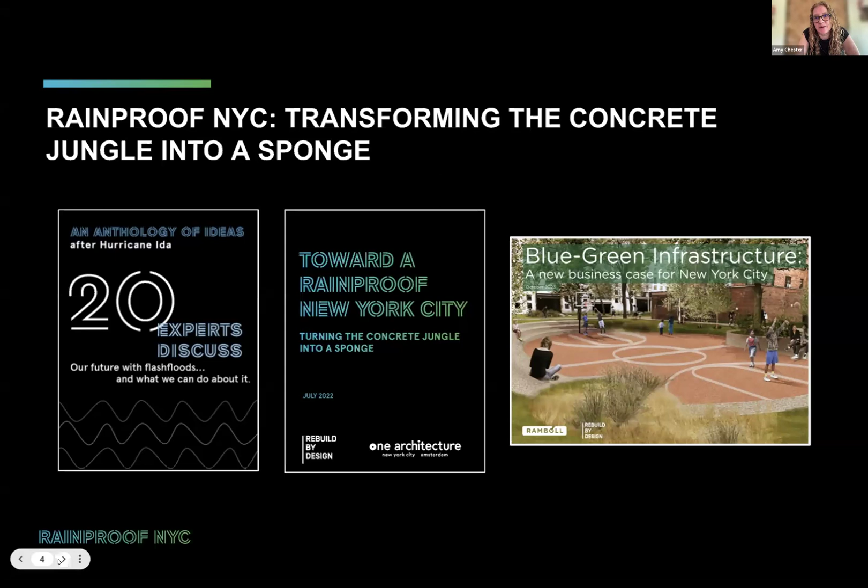We're here today to hear from Caleb Stratton because we are all experiencing increased flooding from rain events. Rebuild by Design has been working on this since Hurricane Ida, and we have a number of resources focused on New York City that will inform policies in the areas you're working as well. Right after Hurricane Ida, we brought together 20 experts who wrote essays on things we can be doing in our communities right now. We followed that with a more thorough report, Towards a Rainproof New York City, launched with One Architecture. Then we did a cost-benefit analysis with Ramboll on blue-green infrastructure in New York City, which found a 2-to-1 payback. If that's a 2-to-1 payback in New York City, I'm sure it could be even higher where you live.

Our overall goal is to adapt with living with more water. Right now we're running 3 working groups in New York City, each co-led by an agency partner and an NGO lead, comprised of NGOs, agency partners, and other stakeholders. We're focused on 3 challenges: how can we shift New York City's policies and priorities to create a comprehensive plan to prepare for increasing rainfall; what an equitable buyout program could look like for New York City; and building capacities amongst communities and the private sector and NGOs so we all share the responsibility.

What's really exciting about the working groups is that we get to learn from other cities, and that's why we are here today. This is one of many events in our Rainproof series, so please, if you're interested, use the QR code and sign up for a conversation with Rosetta Elkin, who wrote the book Landscapes of Retreat. She'll be joined by experts from SCAPE landscape architecture, from Buy-in community planning, and from the Nature Conservancy. If you'd like to see a full list of events, here is our Rainproof calendar.

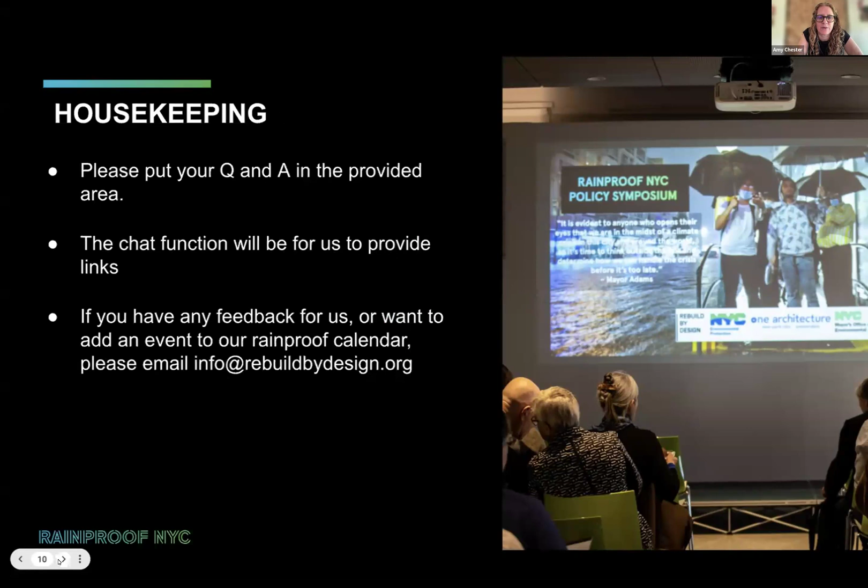Hello, everyone. My name is Rafal, and I'm the Rainproof Fellow at Rebuild by Design. I'm going to introduce our exciting moderator for today's event, Doug McPherson, who's an interim manager at Real Edgemere Community Land Trust. Doug is an urban planner from Queens, New York, and over the past 15 years has worked to expand opportunities for affordable housing, address inequities in open space access, and improve community health. Doug earned his bachelor's at the University of Pennsylvania and his master's in city planning from MIT. We thought it'd be really exciting to bring a New York City native together with someone from a different city, and also someone working in community versus someone working in city, for a great conversation today.

And now I'm going to turn it over to Doug to introduce our speaker for today. Thank you. Thanks to Rafal, and thanks to the entire Rebuild by Design team for creating this series as part of the Rainproof NYC initiative. Rebuild has been really helpful to local organizations like mine in Edgemere, who are no strangers to flooding but are trying to navigate how we can live with more water and bring more meaningful investments in blue-green infrastructure to our communities. Today's event is meant to be a conversation. Caleb is going to present a few slides, and I'll pop in here and there to ask questions.

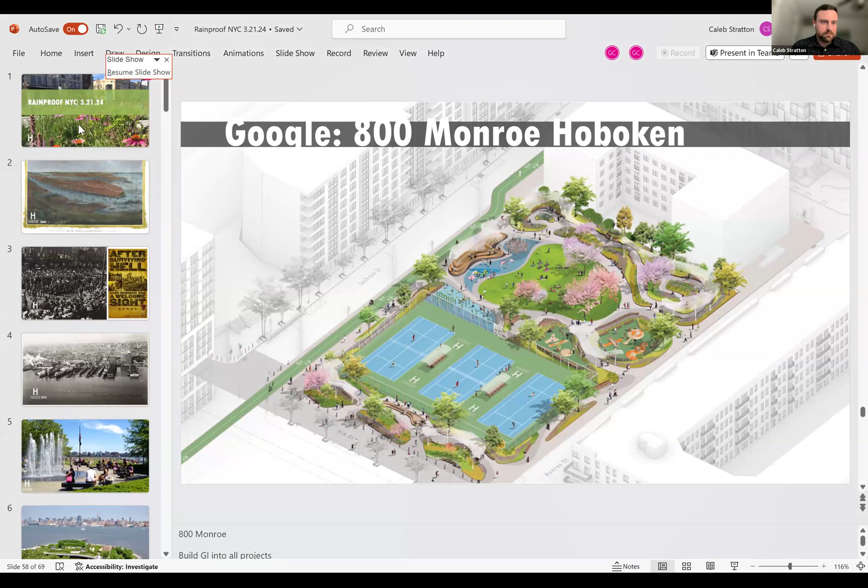So pulling up my slides, Doug, can you give me a thumbs up? We're good, just need to put the slideshow on. Let's see if we can get this going. Resume slideshow. I think we're almost there, we just have to hit a full screen button. Zoom slideshow. Close out of that, let me stop my share and try again. Just give me 1 second.

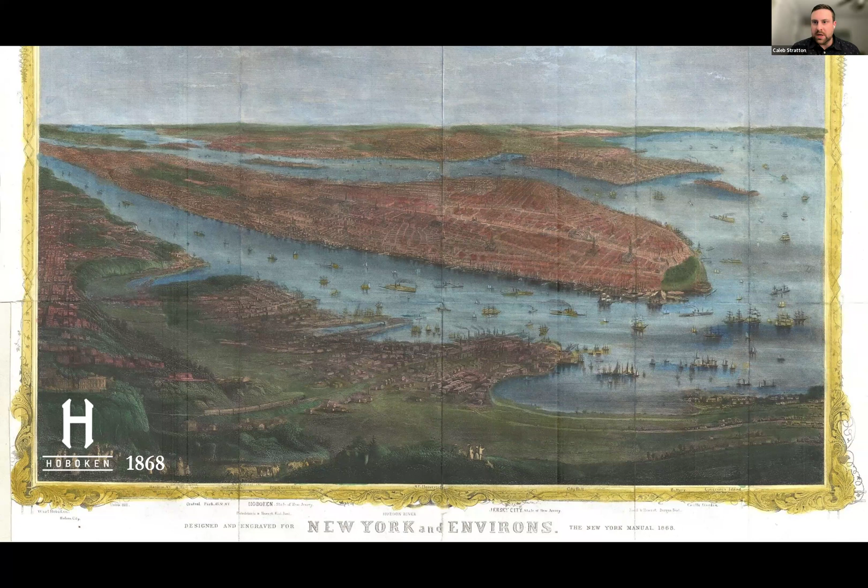So I'm going to start with what Hoboken looked like 150 years ago. The large landmass in the middle is Manhattan, built out, and the small community on the west side is Hoboken. You can see the Palisades, but mostly Hoboken was wetlands, and development occurred in the floodplain and was filled in over time. Just a little statistic: Hoboken was the point of disembarkment for World War I, but mostly it was a working industrial waterfront. And so what does that mean? Kind of low-lying bulkheads, congestion, hazardous materials, and it wasn't really built with the current climate in mind.

Over time, it's morphed into really a recreational waterfront. We have great views of New York City. It's almost 100% - we just purchased the property, recreation and public use for the entire distance of our waterfront, which is about a mile and a half. So our greatest asset is also our greatest point of vulnerability.

This is images from Tropical Storm Irene, 2011, and then we had Sandy in 2012. As you can imagine, that was really a wake-up call for the community in trying to reconcile what we thought was a safe space and realizing that we had to quickly modify our thinking. This is actually my block from Superstorm Sandy, and Grimaldi's is our favorite pizza spot. When that kind of hit home, I was in grad school at the time, and I walked into the City of Hoboken. I was like, I'm studying this stuff, I'd like to work on these issues. Ultimately, I got a job at City Hall, where we started to think through and process how do you transform a community that has different flood risk profiles and begin to adapt.

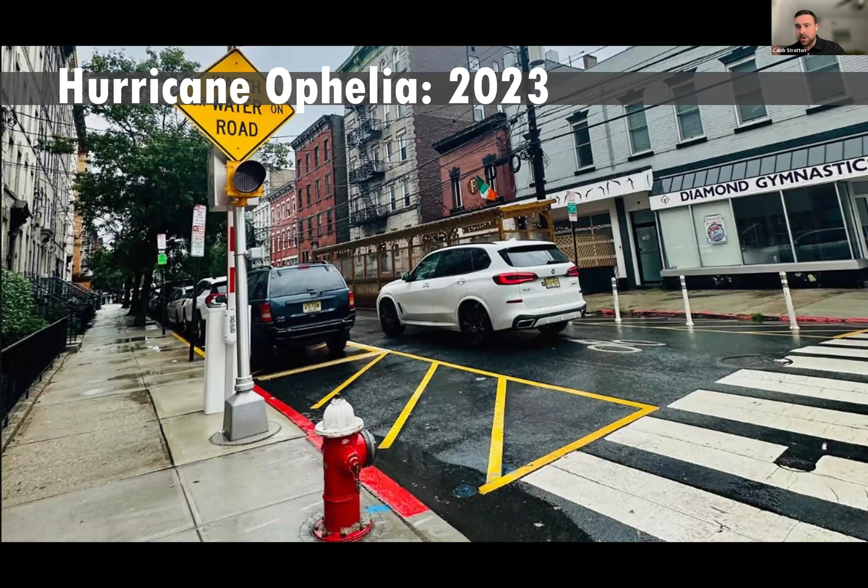Some of the images I'm going to show now, you can see we've had improvement over the years in managing stormwater, so much so that within our combined sewer overflow system, we can manage almost 90% of rain events. Our flood pumps and systems are performing for 50 events a year, and we're getting water on our streets for one tide cycle 4 to 6 times. So when we talk about resiliency, I'm really talking about it in the duration of impact, the extent of impact, and the frequency that it's occurring. So, Chief Resilience Officer hat - how are you bouncing back from shocks and stressors?

And if I could jump in.

Yeah, sure, Doug. It seems like you guys are having a moment right now. We talk about the beautification of the waterfront and flooding. There's recognition of how the investments Hoboken has made over the past few years allowed you to bounce back from a significant rainfall event last September, which would have been a lot more crippling if it had happened 10 or 15 years ago. So it seems like the mood is a mix of celebratory and hopeful that what you guys are doing is working. But if you could take me back to City Hall a decade ago, in the wake of Sandy and Irene, how was the mood different then? Was the attitude daunted by these challenges?

It's very destabilizing when you're trying to wrap your arms around issues and break them down into manageable pieces. To give an example, we didn't have modeling 10 years ago. We didn't have modeling of coastal storm surge. We didn't have modeling of our rainfall floodplain. So when this is happening over and over and over again, it becomes the biggest community issue. And then there's also a feeling of, what do we need to do? What's our responsibility?

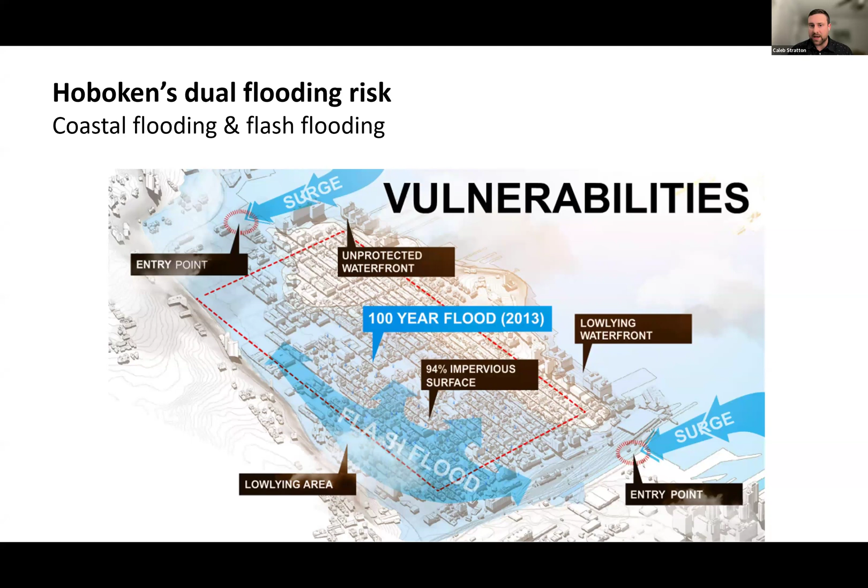So to talk about why that matters in terms of our vulnerability, there are 2 breach points in the city of Hoboken for coastal storm surge, one at the north end, one at the south end. That's how we design our seawall interventions. And then the west side, almost all of it, is vulnerable to flash flooding - almost completely impervious surfaces, mostly built out, low-lying, pre-existing hydrology. It's a wetland - like all the worst things you could have to build on.

So what that means for us is that in dark blue, these are our rainfall flooding hotspots - places we know are going to flood if we get a lot of rain. More than 0.8 inches per hour tends to produce some kind of street scale flooding in Hoboken. The light blue area is really the area that flooded during Sandy, but also our coastal floodplain. It's also a regulatory floodplain, so that's where we're modifying building construction. More than 80% of the city is in that coastal floodplain.

I think these statistics are important because the NFIP does insure $2.3 billion of property in the city of Hoboken - I think we're second or third in the state. Our residents pay premiums of $8 million a year, and that's like paying for health insurance. But there's a cap to that program, and what that cap means is we have a delta of about $8 to $10 billion of flood risk that's not covered by the National Flood Insurance Program. So what does that mean? That means we have a lot of room to develop interventions to reduce that risk, and also defray future premium increases for insurance.

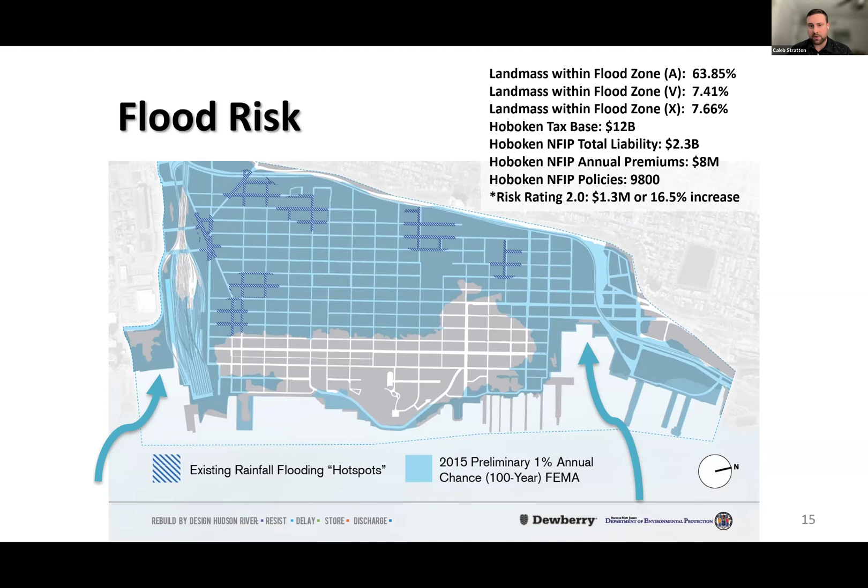I got to see Amy talk last week, and these are real concerns for people that have policies and premium increases. The risk rating 2.0 that's rolling out is substantial - a 16% increase through 2025 for our residents. So we want to defray insurance costs, we want to defray actual flood risk, and we were fortunate enough to work with Rebuild by Design back in the day.

This is maybe 2013, 2014, we got started. There was a federal program at the time with a big pot of money that was put out there. Rebuild organized teams, led the design conversations. We worked with Royal Haskoning DHV and the Office of Metropolitan Architecture to develop a 4-part integrated water management strategy.

We borrowed from the Dutch, and we took advice from international experts, which is Rebuild's bread and butter. The 4-part water management strategy for us is, number one, keep storm surge out of the community. That's the resist element. Then using their 3 strategies: delay, store, discharge, but there's actually an ever expanding list of strategies we're using.

Discharge is active pumping during rain events. Delay is keeping as much water out of the combined sewer system as possible. And store is developing underground detention basins that we can control and that create more capacity within our sewer system.

So Rebuild helped us take that uncertainty, break it down into strategies, and put it into actionable pieces that the city could undertake, that the state government could undertake, where we could get federal support. That was the initial $230 million award for the resist element of the project. That project is now $392 million. So good ideas beget additional financing.

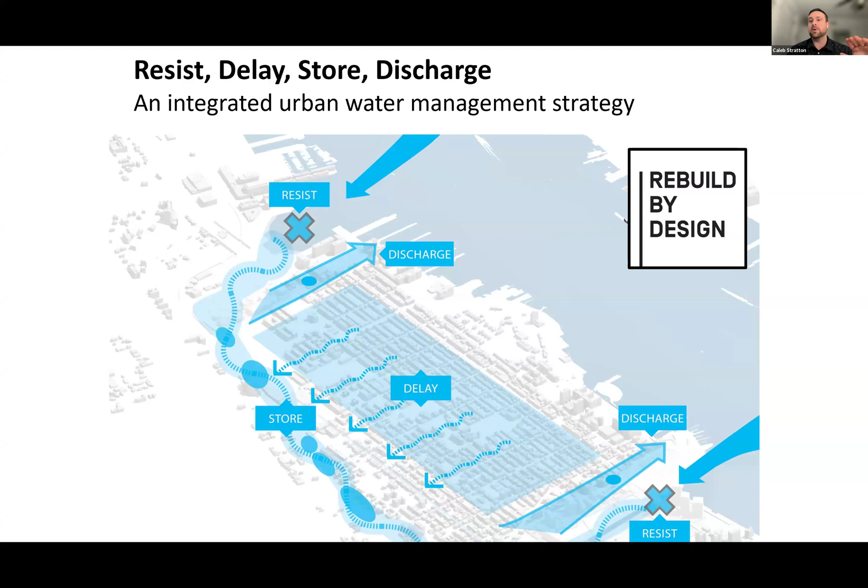I just want to, if I slow down too much Doug, speed me up, but I'm going to get into the exciting things quickly here. I just think it's important to talk about where we came from and where we are now, because you go from the concepts into, where does this go on paper?

The dark blue area here, north and south end, the reason why these lines are askew and not directly on the waterfront is there was a public feedback process we went through. If you build on the waterfront, it's taller, it keeps people away from the waterfront and engagement. What we heard was: don't take away our views, don't disconnect us from the waterfront, don't build in our neighborhood, don't build in front of my property, don't build behind my property, but don't leave me out. There's a bunch of different constituencies that went through the concept development process.

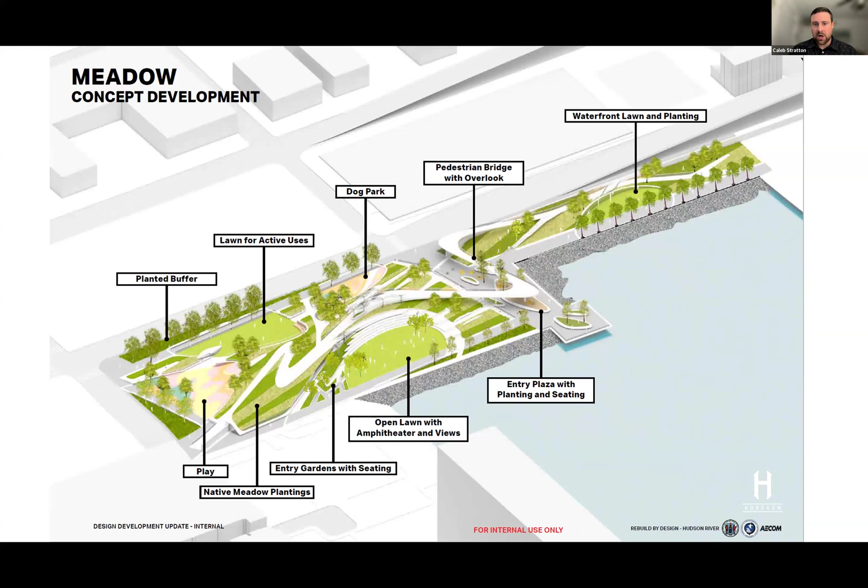I just want to touch quickly on Rebuild by Design, the elements that we're doing on the waterfront. We're going to build parks, and this is a concept that incorporates an 11-foot high seawall underneath an active area on the west side and a passive area on the east side, with a walking path that traverses the high point in elevation. The concept was to maintain access to the waterfront, but we're also going to use gates. As far as scale goes, this project is about almost 2 city blocks in size.

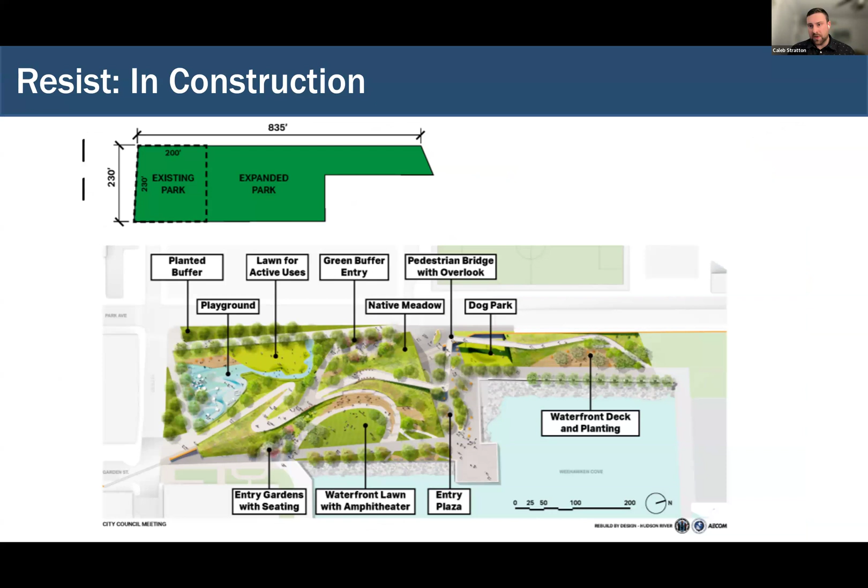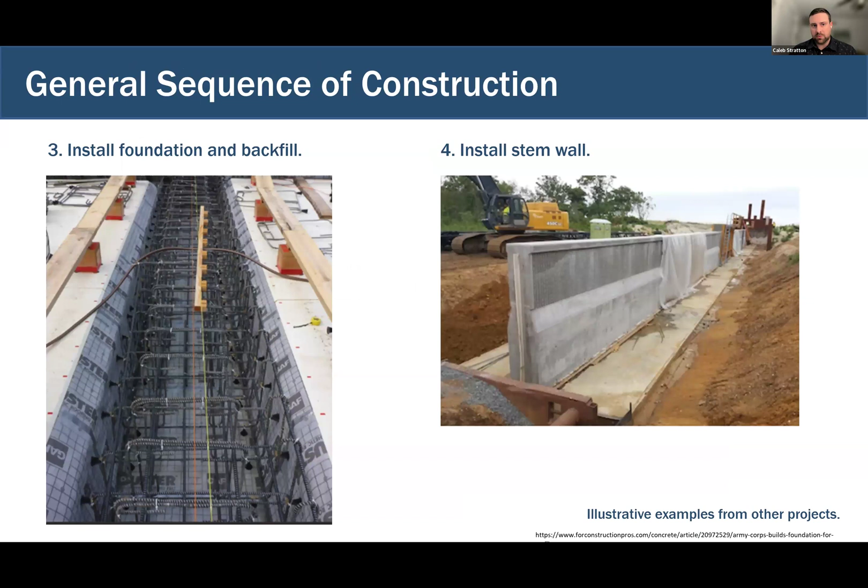This is part of that state partnership for coastal flood risk reduction. Underneath that is heavy foundation construction with foundations and stem walls. But what it ends up looking like as it winds its way through the city is something we've used an aesthetic treatment for.

So color, material, landscaping - the colors we chose are from the state flag of New Jersey, but it's also Dutch, also safety orange. It's something that contributes, we think, to the urban aesthetic. Communities fight about what that actual color ends up being - everyone wants to do a dark blue and have it blend in. There's still tension on what the aesthetic of that's going to be over the long term.

Everything on the backside of the city of Hoboken, really rainfall related, is what I think this group's interested in - how we manage our infrastructure that's interior to this coastal levee area.

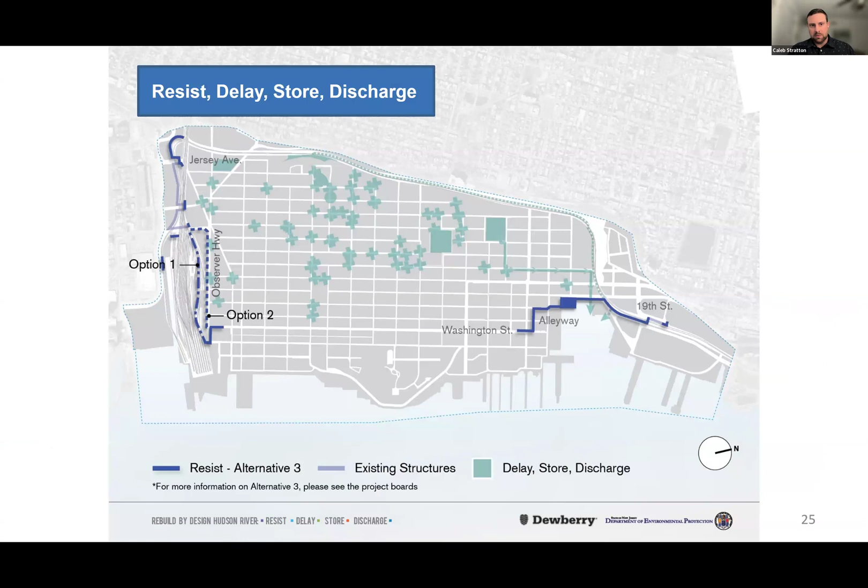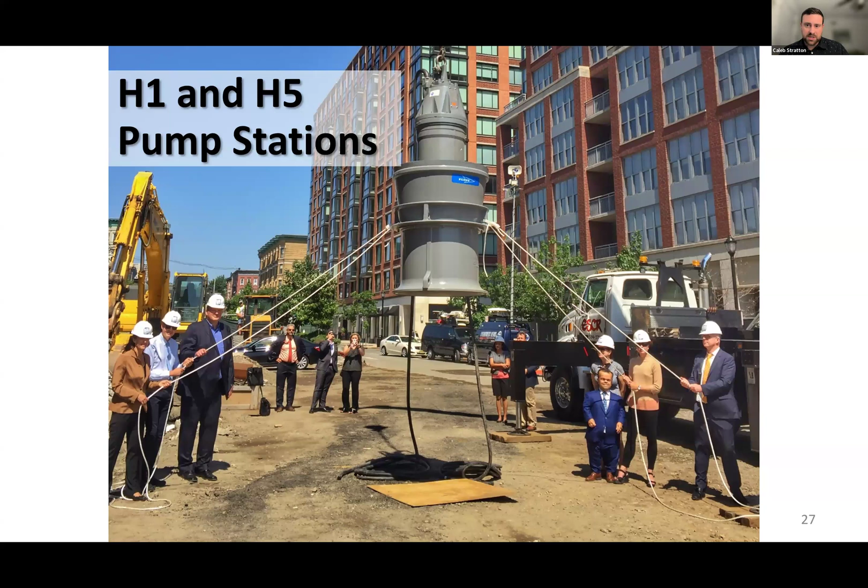In siting the pumps, we did those in the right of way. This is the first pump station we constructed, H5, part of our discharge strategy. This is what's going on below ground, connecting into our CSO, and that's how we actively manage rainfall when it exceeds the capacity of our park systems.

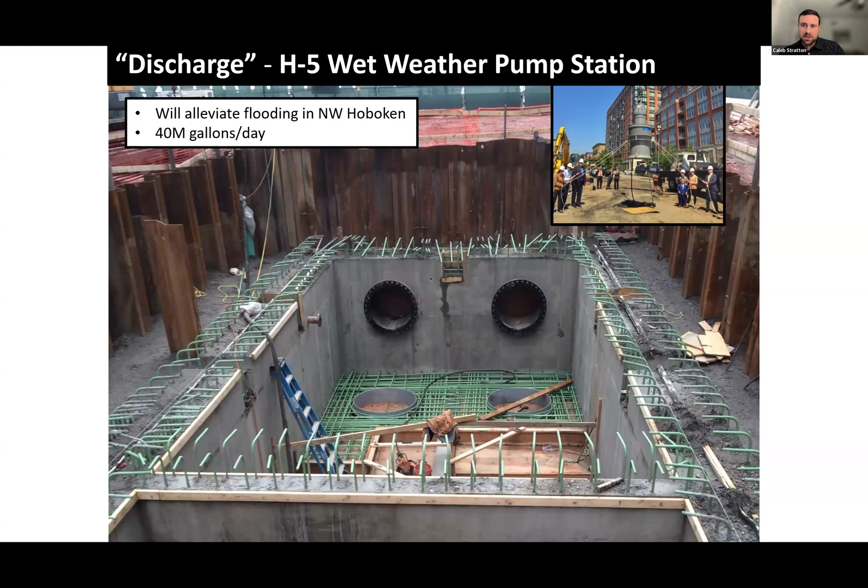The second pump we built is H5, designed by local architect John Stasi. This is a 40 million gallon per day pump. The reason there's this large external housing is because we have backup generators, since our H5 sewer shed is in the lowest lying area of the city - we want to make sure it stays online.

Our H5 sewer shed is also part of where the Housing Authority redevelopment area is, and we actually dewatered the city from Superstorm Sandy with this pump station.

Getting into the delay and store projects, the first one we did was a demonstration project at City Hall - taking all the downspouts from City Hall and connecting them into cisterns. The cisterns are then used for rain gardens. We did porous concrete there and built a green roof, but put it on the ground.

The idea was, what is the lowest cost, highest impact investment we can make? For less than $500,000, we took an entire city block out of our combined sewer overflow, while also being able to demonstrate proof of concept for what green infrastructure looks like and how it's managed.

This was what ultimately got us into the development of Southwest Resiliency Park - a 1 acre site we acquired that was a surface parking lot. We went through design concept, mostly passive uses - there's a dog park here - but the purpose of that project was to make sure that in Southwest Hoboken there's park space within a 5-minute walk, and it had to manage stormwater very well.

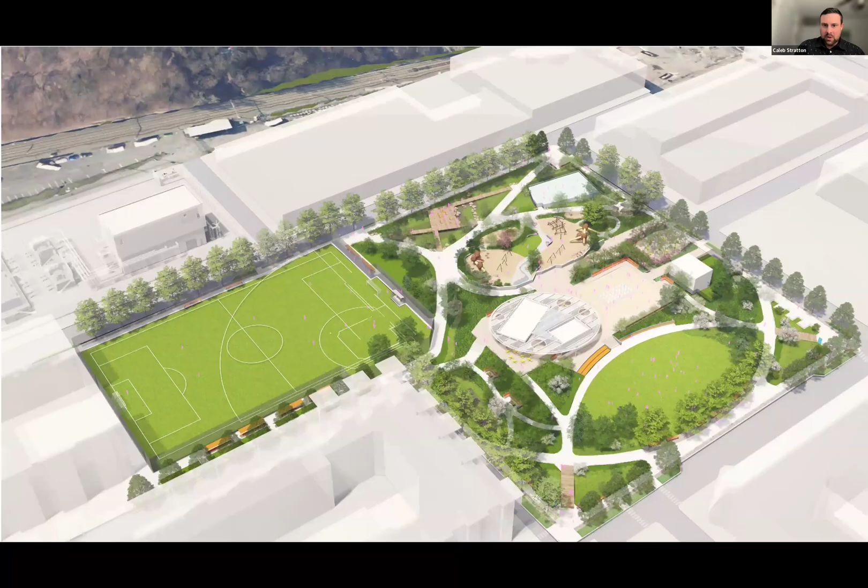Our next project, a little further north in the city, was Resilient City Park. The concept was to buy the most acreage in a sewer shed that we knew had a lot of flooding. It was a large acquisition, so the city used our Open Space Trust Fund to do a $30 million acquisition, and the project itself was about $50 million.

On the surface you see active and passive spaces and the use of green infrastructure, but what's really going on below the project is where we spent the majority of our money. Deep pile foundations, and the pink is a 1 million gallon tank connected to the H6 pump station, our third pump station. This project is exciting because it's also part of a storm sewer separation that separates sewers in a 40-acre watershed in the city, with a treatment train of surface rain gardens and MS4-compliant separators.

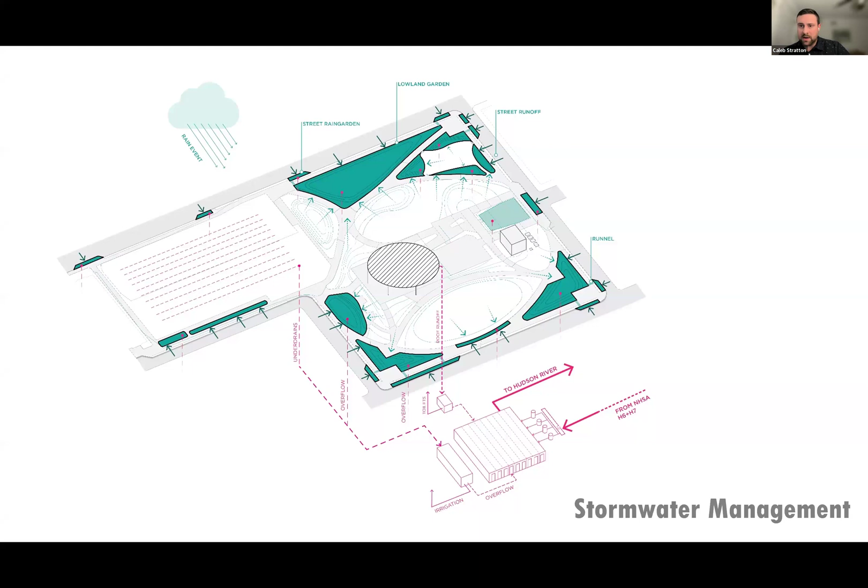You're getting stormwater treated into that basin, connected to a pump station that then goes to a new force main and outfall, discharging clean water to the Hudson River.

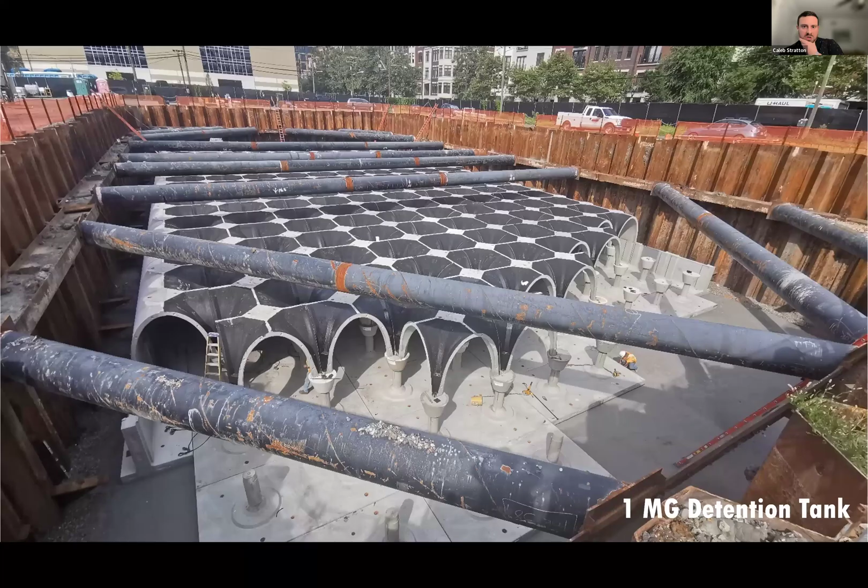These are construction images of the pump station being built on the north side. This is what that underground cistern looks like in construction—sheet piling down to bedrock. This person is doing some kind of epoxy treatment on one of the joints. It's a heavily engineered practice; the tank itself is about the size of a city block.

In one city block, with a 1 million gallon detention tank and a force main, we can manage a 40-acre watershed. This type of practice is really important for water quality, which is how we're able to partner with North Hudson. I want to emphasize this point: we do not have the same goals. Water quality control is different than water quantity control.

I'm building basically like a FEMA project, looking at rainfall and flood risk mitigation. We had funding through FEMA for this project—$10 million to build this tank. North Hudson, our sewage authority partner, was competitive in getting FEMA funding for their pump station, but it also impacts the EPA clean water requirements.

What that looks like today is, again, just a surface park with blue sky performance treatment. The soccer field actually has a ton of storage underneath it—large aggregate HDPE piping laid out, so you've got high void space underneath an active field.

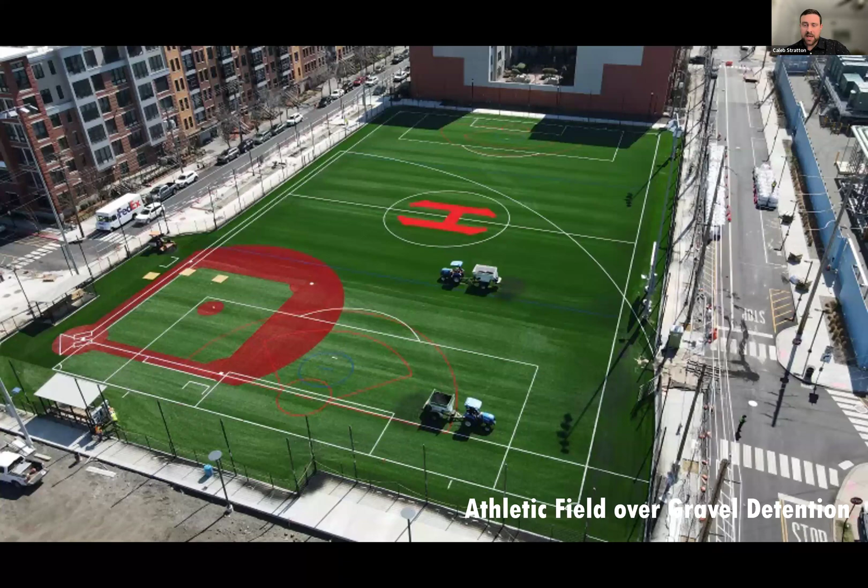Outside of that tank, we have another 1 million gallons of storage and various features, like a basketball court. This court plays like a basketball court and looks like a basketball court, but it's sunk below grade—it's another Dutch idea.

I don't remember where we saw this, but it's been done before—it's a feature where instead of water pooling at intersections or being pushed towards properties, it drains into the park, into the basketball basin, which is immediately adjacent to stormwater features.

I have to give a shout out to our transportation department—they've been a huge partner in doing curb extension bump-outs and rain garden bump-outs.

So Hoboken hasn't had a traffic-related fatality in 7 years. I see that as a huge win for our quality of life and our residents, and just the basic safety of it. But to integrate it with our resiliency efforts, what we're getting is now you have a wider pool to pull funding from. So every time I see a transportation project, I see a resiliency project, because I can either expand the curb edge, put in planters, put in tree pits, put in rain gardens.

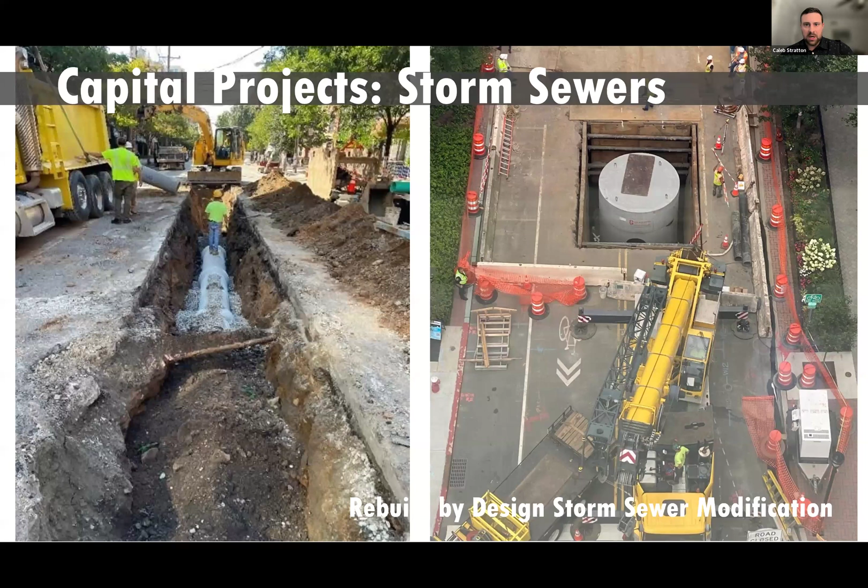I already touched a little on how we're incorporating green infrastructure into road projects. That's not exciting, the storm sewer separation, it's heavy work in the streets. You're reshaping watersheds, adding compliant treatment. This big giant hole in the ground is where you're dealing with floatables and contaminants that enter stormwater just from being on roads. Ultimately, when it's discharged to the Hudson, you're getting something that's not harmful to the environment.

And it's a positive that gets reinforced. We see it in campaign materials. We see it in getting acknowledgement up and down the ladder from state and federal officials. So every time we can, we try to pull people into our projects and give them ownership and pride in the work we're doing.

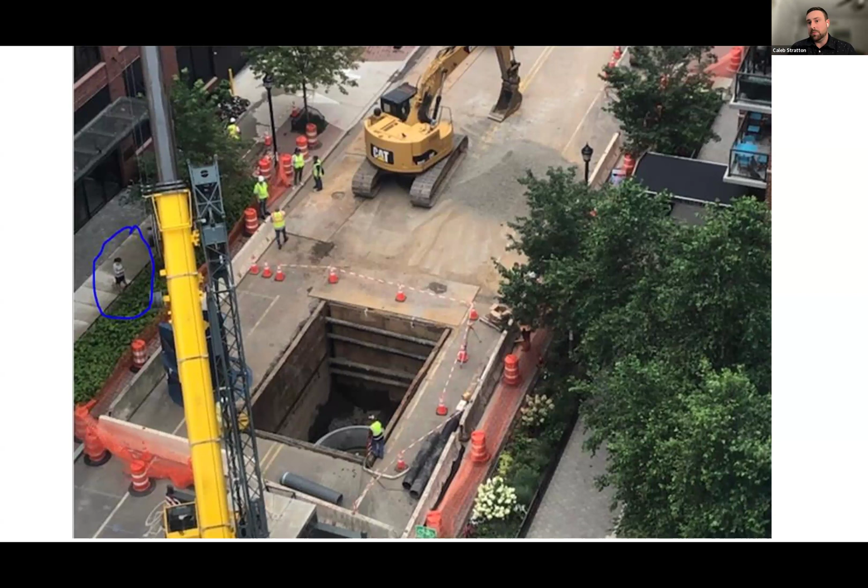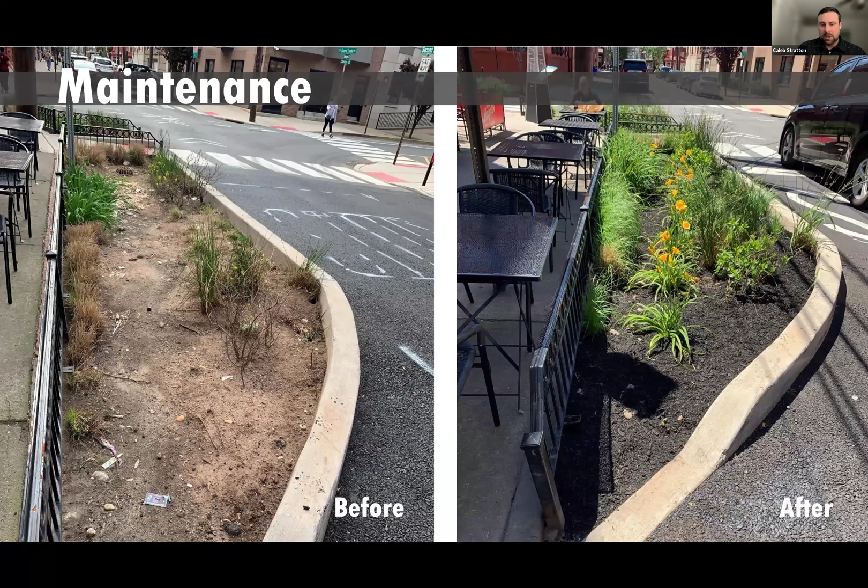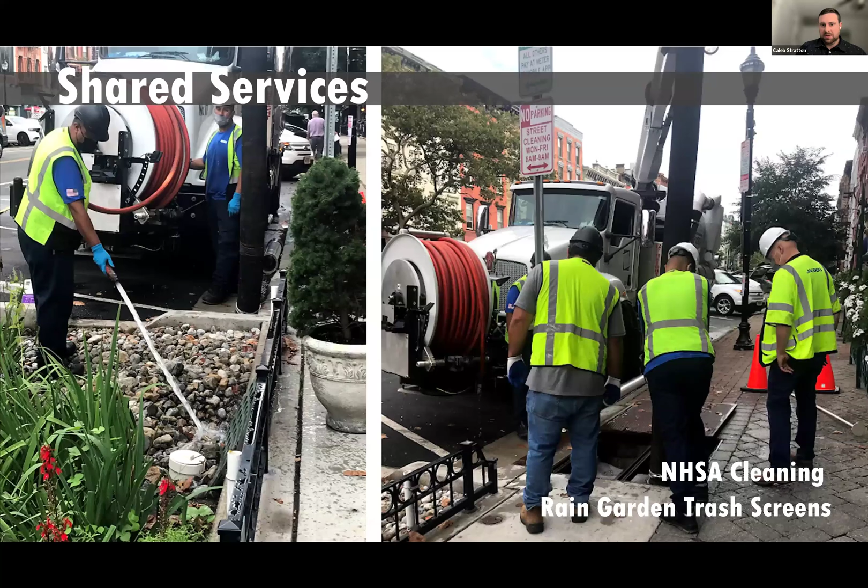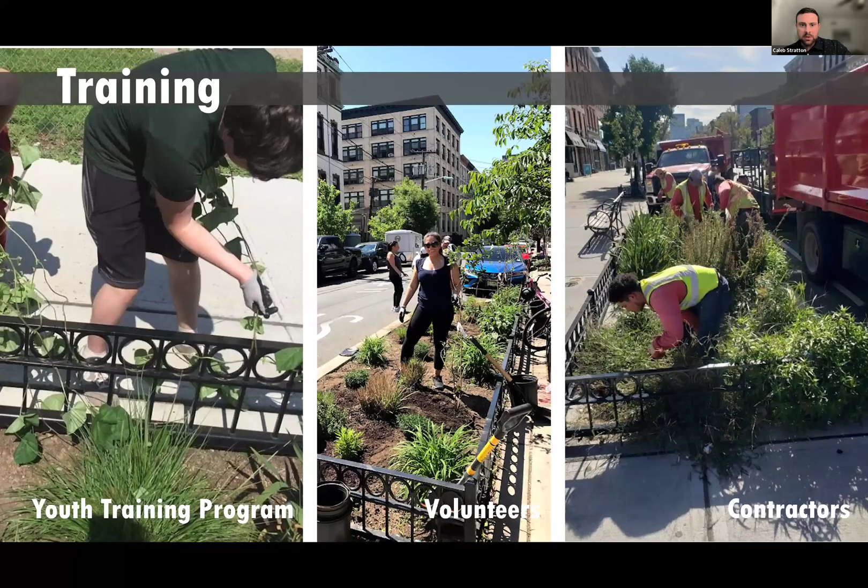We have volunteer training, like a spring fling, to get the community out to weed. We have a youth training program that's really like trash pickup and preventative maintenance. And then we hire contractors when necessary.

We also have our Parks, Recreation, and Public Property team, who I'd hold up against anyone. I can't say enough good things about their work. If it's a less sophisticated practice, we have them out there doing some landscaping and basic maintenance.

I know maintenance is a topic that usually comes up, and it's an area of concern. I'd say over the last 10 years we've learned quite a bit. At the end of the day, you have to maintain the practices that you build.

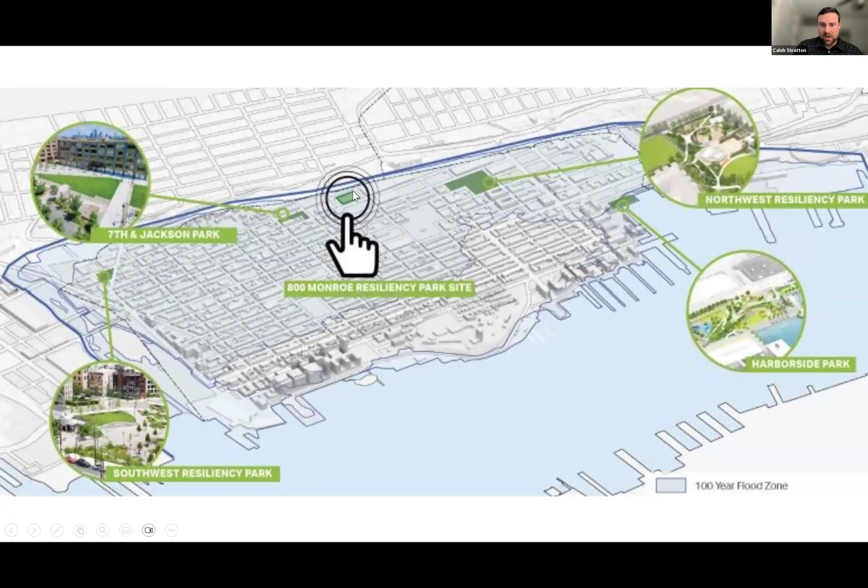I want to shift gears to talk about two projects we have coming online. This is an overview slide, and I apologize that it's a little grainy—I wanted a better image, but it shows the relative locations of the projects I was discussing: Southwest Resiliency Park, 7th and Jackson, Harborside Park, which is the coastal flood protection measure, and Northwest Resiliency Park.

800 Monroe is on that same west side. This will be done as part of a redevelopment agreement, so it's a developer-funded project. When I was preparing these slides, I thought they were interesting because they let you dive in.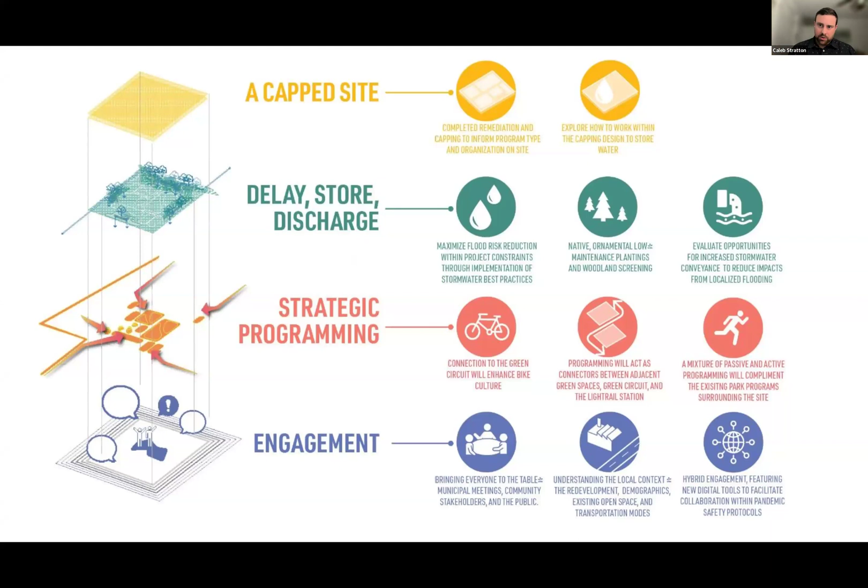You've seen our strategy at a macro level—resist, delay, store, discharge. But at a micro level, this is what we go through: what are the existing conditions? It's a capped site with contamination. What are our priorities? Delay, store, discharge. How do we realize that? What's the strategic programming? Then, through the public engagement process—using a template from Rebuild by Design—we go into the community and walk through those design drivers. It becomes a bit of an iterative process.

There are buildings in this area, so the difference between active and passive is kind of the leading edge of the project. Ultimately, what you end up with is this surface treatment. In this project specifically, we're using a lot of trellises because of the establishment period for new plantings for trees—although there's already a ton of trees on site, there's a lot of surface green infrastructure, plus subsurface infrastructure, separated sewers around the project, and adjacent transportation assets because there's a light rail station next to the project. I'd say, Google 800 Monroe.

I'd sent Amy a couple of links—we build story maps for all these projects, so anything I'm talking about now is probably linked to a story map online. That goes through the design documents, the process, and generally how engagement occurs around developing these concepts.

Oh, I think you just answered the question. I was really just curious about the tools you use to tease out preferences for active versus passive open space, and since these projects take so much time, how do you keep people up to date on what's going to happen in their neighborhood and when?

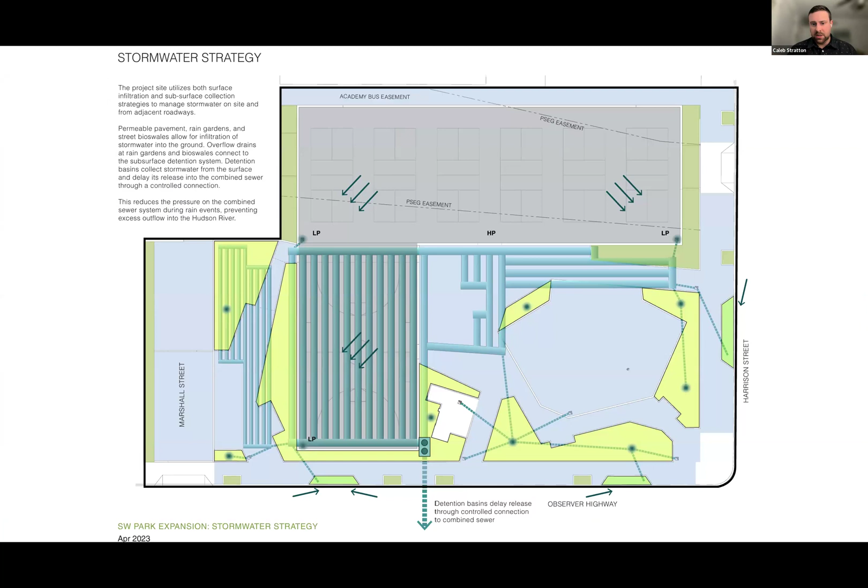We've got a utility easement on one whole half of the site. You can see the distribution of the surface rain gardens. It's kind of like we can't fit underground detention on every square inch of this. So we're focused on where we're putting detention and how water is moving on the site. And ultimately, we're doing a sewer separation adjacent to the site as well.

So this is just a rendering of how the storm impacts the site—where are the areas where water is getting collected, and how does it go into the detention basin?

We're doing a pump, actually, because the grade here is like 4 feet above sea level. To create the detention under the park, that outfall point is actually lower than our combined sewer. So we're putting a pump in place, pumping back into the combined sewer system, but linking back into that system somewhere closer to our H1 pump system. So you're getting this rainfall treatment back into the CSO.

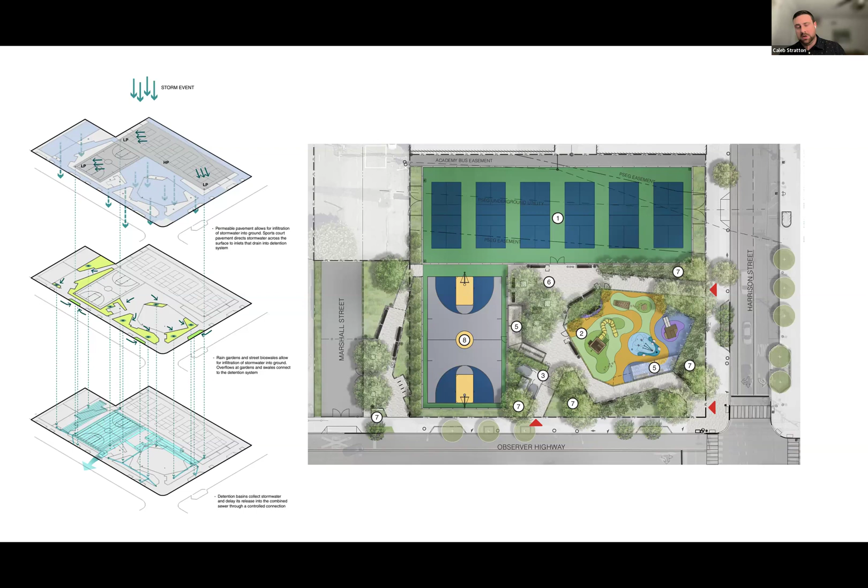It's not perfect, but I would say this is definitely an improvement in our design development process over the first Southwest Park. And at the end of the day, you get programmed open space.

The expansion of Southwest Park, I think, is interesting to discuss because the I-Bank is State of New Jersey's state revolving loan fund—that's EPA funds that get pushed into really like a no interest, low interest, partial debt forgiveness package. So if you look at these different funding sources: municipal open space trust fund, so that's outside of the budget, that's not a municipal bond, that's not debt service.

The I-Bank with principal forgiveness. We have a Green Acres program, which is a state-funded program, the Urban Park program, another state-funded program, and then we received $6 million from FEMA because the project fit within the environmental impact statement.

We did a benefit cost analysis. We expanded the actual watershed around the project to direct more water to this site, so we can realize a better benefit. And this is just an example of a funding profile.

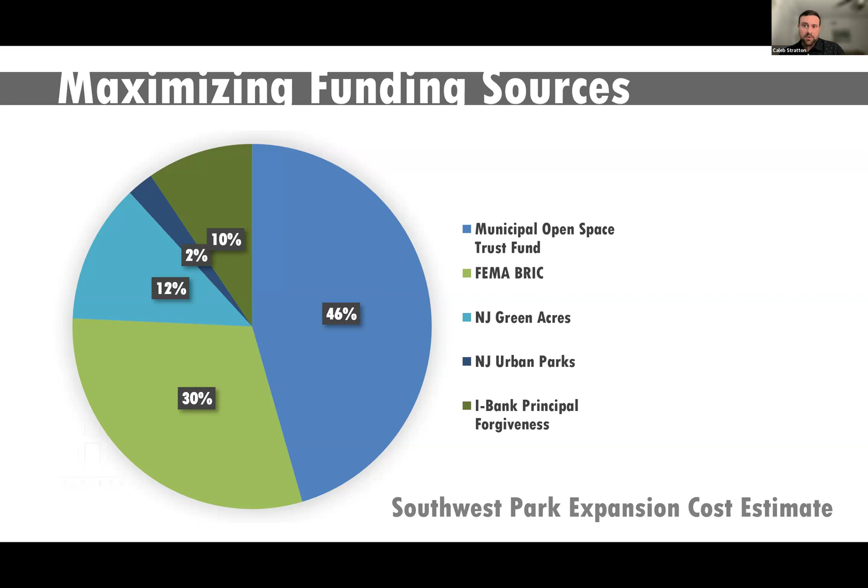We got bids back somewhere in the neighborhood of $9 million to build this project. And we're going to get $6 million from BRIC, and that's going to fund a portion of the park and a portion of the pumping station. The cost estimate for the pumping station isn't part of this because it's going to be part of another shared service agreement and partnership that we do with our sewage authority.

I'd put the site in there, but I think it's less important—it's just showing the costs and benefits in different categories.

How do we get a BCA that works that's more than one? I know Amy talked about it, it's always 2 to 1. In this case, because we had a pre-existing park next to this site, so even though there's residual flood risk, our BCA was reduced because of the impacts of that prior project. So that's why this number looks a little lower.

These are just real costs. This is how we submitted to FEMA. So it's a little bit—there are other benefits to this project that aren't necessarily part of that calculation. But when you see the big benefit, it's the park project.

So the estimate that we had to put into the cost of the project is actually much higher because our bids came back so competitively. So we're seeing a little bit of—I don't know if it's whether the contractor has done prior projects. Our engineers are still reviewing the bid tab, but we're looking to award a contract that's $7 million less than our design estimate for the project, which is really unusual for us and kind of the first time we've seen it. I think that we're going to have additional costs.

We didn't bid the drainage improvements in the roadway, so I think that might be where some of that delta is—where the actual physical construction of the park might be $9 million, but then we're doing the pump and the drainage improvements. That's going to add additional project costs, which get us up to this $17 million number. So I wish I was more in the weeds on this project, but that's just my understanding of how we get to that benefit cost analysis.

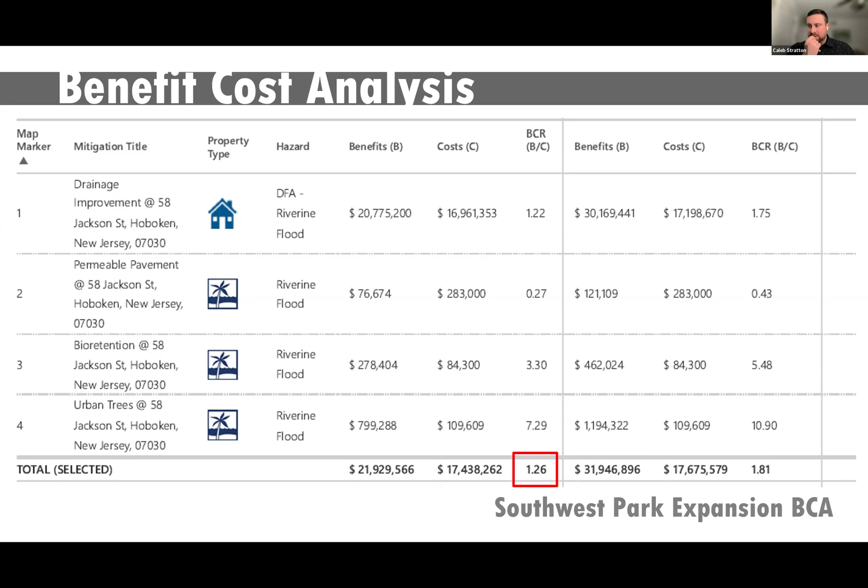I think it's fundamental to begin with the end in mind. It's not necessary to do a benefit-cost analysis, but it sure makes it easier to have that conversation if you're going to approach getting into these larger pools of federal funding. We got exposure to the benefit-cost analysis through the Rebuild by Design process, and we make it a standard part of every one of our projects that we're always trying to achieve a BCA of at least one. The best way to do that is to start with a comprehensive approach.

But I'd say aligning projects so that they're part of a network, not trying to necessarily solve upstream or downstream issues in isolation, but trying to address things holistically - I feel like I'm repeating myself, but in our case that's what has worked, is taking a comprehensive approach. I'm not suggesting there aren't outstanding projects that address very site-specific issues. But the purpose of Rebuild by Design was to enable a community to transform from high risk, high vulnerability to low risk, low vulnerability, doing that through these four strategies.

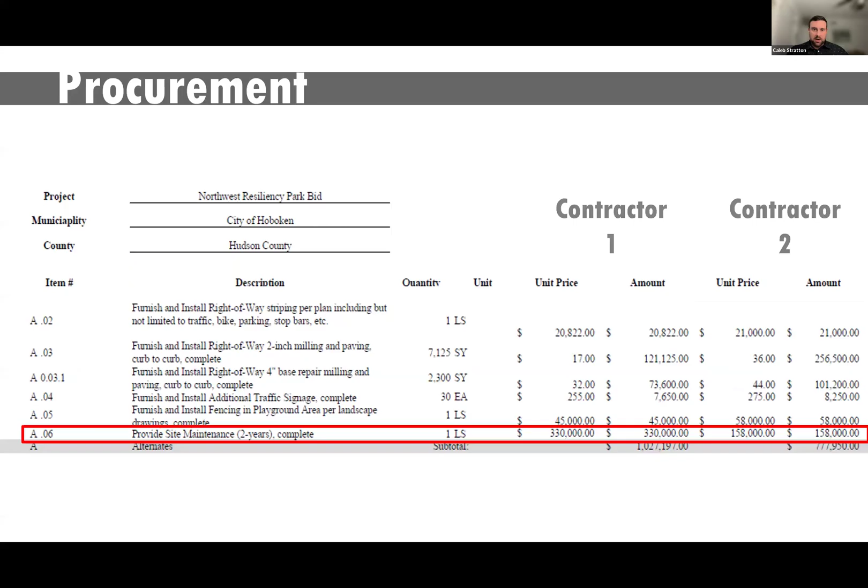Going back to Northwest Park, when we built that big cistern, the reason there's sheet piling all around is we did depth-of-bedrock sheet piling, dewatering, external and internal well points, dewatered that water table, and built this about 25 feet below grade. The actual detention tank is watertight, so there's no infiltration into the tank from that Great Lawn area.

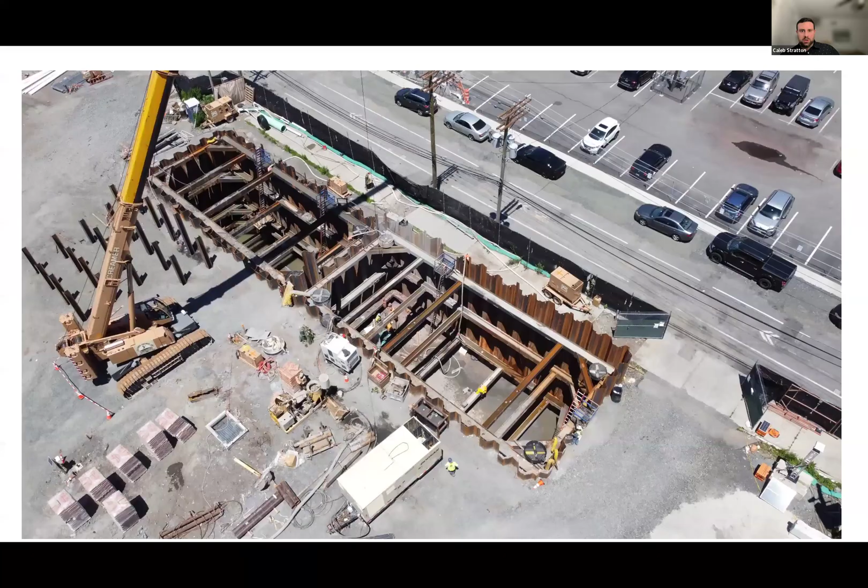So the water table is definitely a real constraint and a challenging one, which is also why we're moving to that tank-plus-pumping approach at the Southwest Park expansion, because then you have greater head for gravity.

We got another question here. Some of these infrastructure investments are very expensive. How do you assess the community's reaction to these investments? Do people feel like the money was well spent? Has there been scrutiny of that? What's the conversation been?

That's another great question. Our open space trust fund, which we used for a lot of the acquisition and debt service for these projects, was established by referendum. That's literally people voting, saying yes, we want an open space trust. We actually increased that tax, which was again done by referendum. I think we had more than 75% of people voting yes, we want to be taxed more for open space.

So I would say at the individual level, it's very positive. If you go to the neighborhood level, it's very positive because you're creating a neighborhood asset. You're addressing open space and flood risk. If you remember, 80% of Hoboken's in the floodplain, so no one really wants to live in a neighborhood that floods all the time. It's tough to get to work because the streets are flooding.

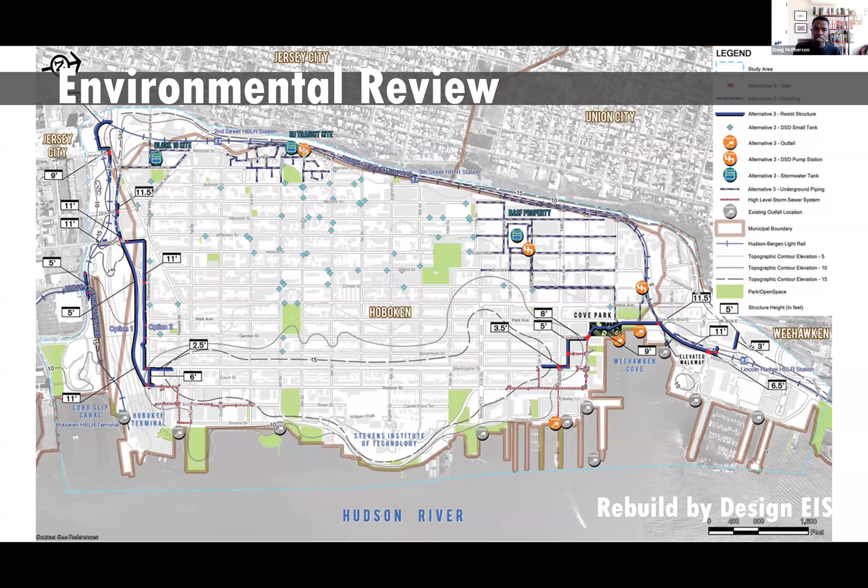So we talked about funding sources for a few things. We had one question about maintenance: how is the city funding and managing maintenance of the rain gardens? Is there one answer to that, or is it a combination of things?

So we have shared services with North Hudson. They're doing the technical work. If there's something below grade, or if there's a trash screen, they do it as part of their catch basin clean out. If there's something less technical, we have youth training, volunteer work, contractors, and city staff.

There's one thing I left out: on our main commercial street, Washington Street, which is about a mile long, the Business Alliance actually pays for the maintenance of those practices for beautification. But also, like a New York City audience, people went sideways about how many rats are on the street, and we get constant complaints about it. So we actually have pest management that overlays with the rain gardens, because people think the rain gardens are the reason for the overpopulation of rats.

And I was like, I don't think that's the case — we don't have enough rain gardens to have as many rats as we have. What it actually came down to was burrowing material, and when you treat it, you kill the rats and they don't come back. Or it was a containerization issue, because we didn't have standards for how people put garbage out, so rats were like, this is delicious, we're going to eat all of this.

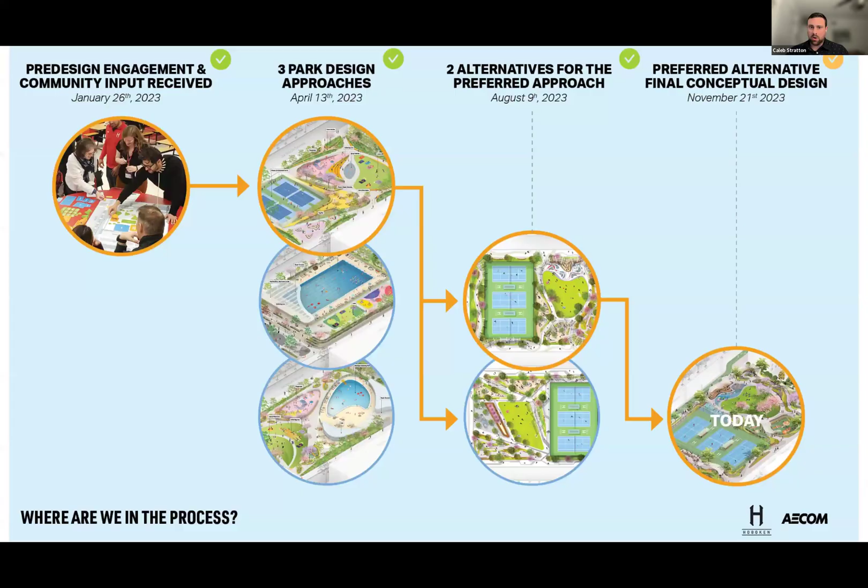If you zoom way back out, part of the reason why we have to maintain the practices is because the delay store discharge elements of our water management program are directly related to the functioning of our coastal levee. So we're building seawalls and levees to keep storm surge out. All the delay store discharge elements have to function, they have to be measurable, and it has to be a practice that is performing to our design goals so that we can certify to FEMA the performance of the system.

And what that generates is called a conditional letter of map revision. Within that conditional letter of map revision, it means that we're taking out properties from the National Flood Insurance Program. So literally, we're going to see a premium reduction for the people paying into the National Flood Insurance Program. And what we think we'll be able to do is through that premium reduction actually generate funds to maintain the system we're building. So instead of someone just paying for insurance, they're going to get a reduction in the insurance bill, and they'll be able to transfer a portion of that to actually maintain a system that's protecting their assets in the community from these different flood risk profiles.

We got one local question.

The New York area is going through this major New York, New Jersey Harbor and Tributaries focus area feasibility study, the HATS study for short. How will Hoboken be affected by that, and does what's planned for that study, and whatever phase it's in right now, affect how you guys are thinking through your resilience strategy?